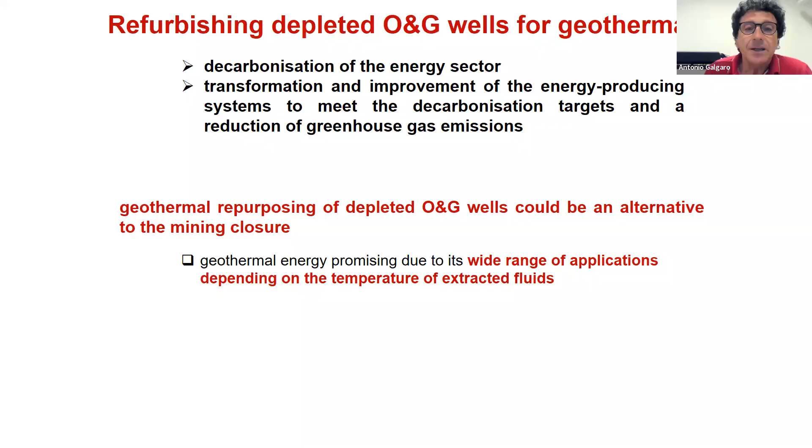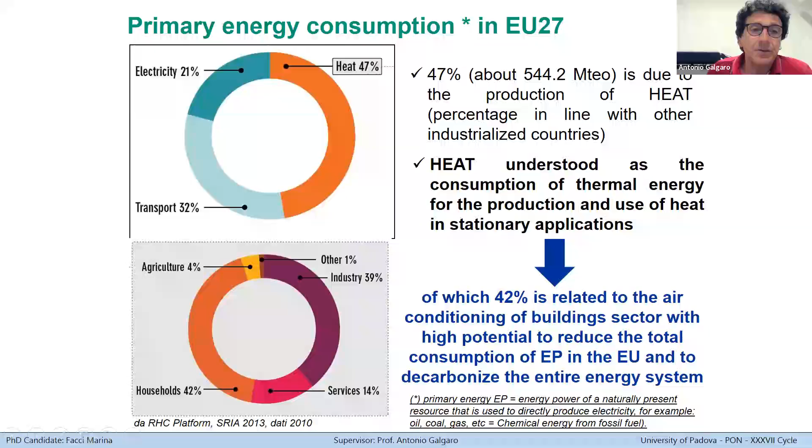We have evaluated in Europe, in the extended Europe of 27 countries, that one of the most important requirements in terms of energy is the heating of households, residential heating, and even electricity for residential and other types of users.

Oil and gas production is often linked with a large volume of waters, and in a lot of cases, due to the depth of these wells, the temperatures are higher than 100 degrees. The residual fluid after hydrocarbon use is water. So there is a sort of resource of heat and fluids that permits transferring heat from the depth, from the bottom of these wells, up to the surface.

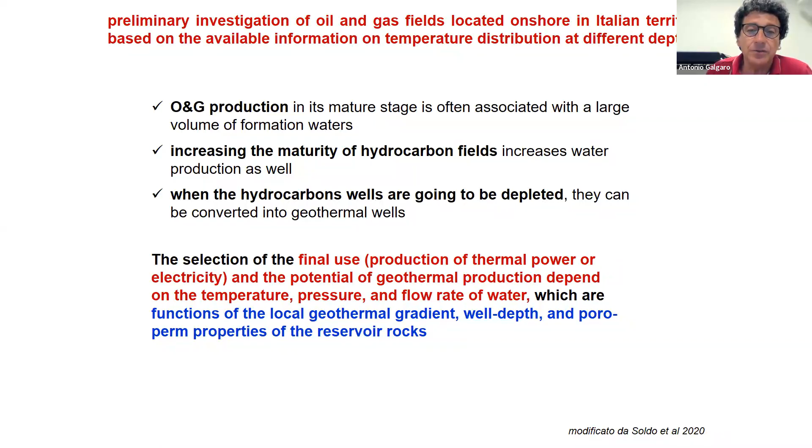In this case, there is no emission of CO2 if I reuse these wells with closed-loop solutions, which permit, thanks to the circulation of fluids into the wells, extracting heat from the ground and using it for all the needs of stakeholders, particularly electric power or direct use of heat.

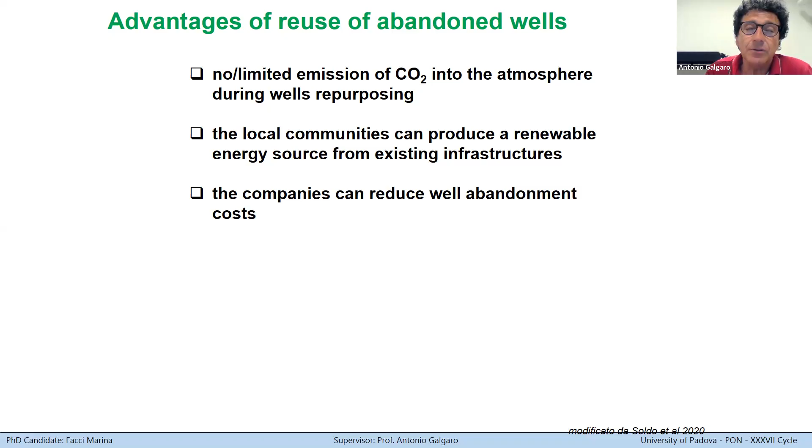Even industries can use this solution for heat needs in production processes, or for heating houses, or for instance in agriculture fields such as greenhouses or fish farms.

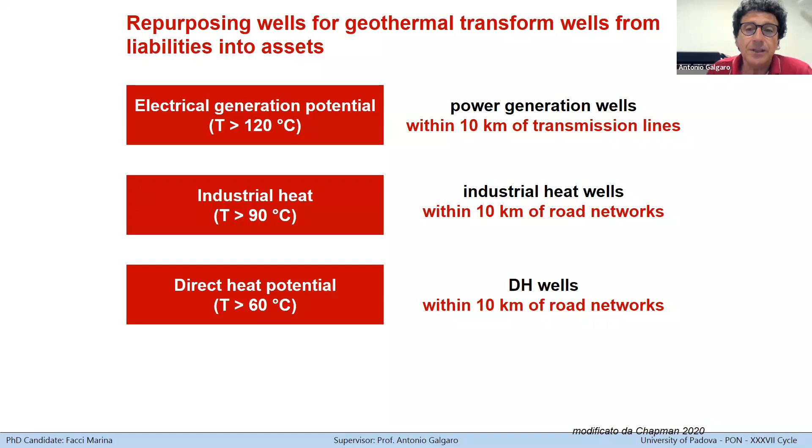Taking into account that the temperature of the wells changes the use, during our research we evaluated the higher temperature conditions. This information is available thanks to hydrocarbon drilling databases, and it's possible to adapt these wells in different ways to extract heat.

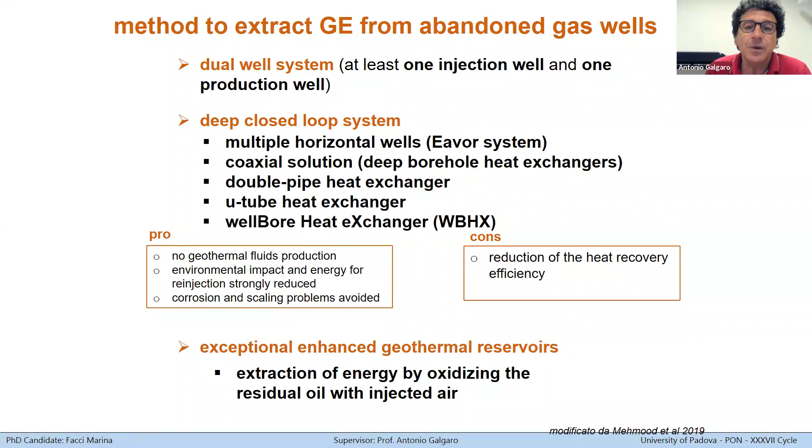In these slides you can see the different types of solutions. I'll show you the general aspect of the double pipe heat exchangers or U-tube, and the coaxial solution will be explained and shown by Dan Azimi, the PhD student in the last year of his scientific adventure, who will show you the results obtained from his studies, particularly in high temperature environments. I will show you only the middle of the three types of solutions.

Maybe I can use two wells close to one another, one for abstraction, one for reinjection - this is an open loop system. But closed loop systems are divided into two main families: the U-tubes, a couple of wells connected after refurbishing the two vertical parts horizontally to obtain higher efficiency in the heat exchanger process, or the coaxial systems that permit using only one borehole to extract heat.

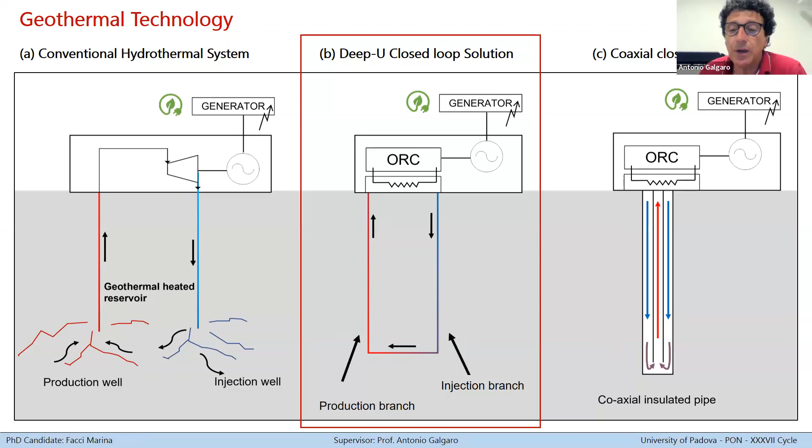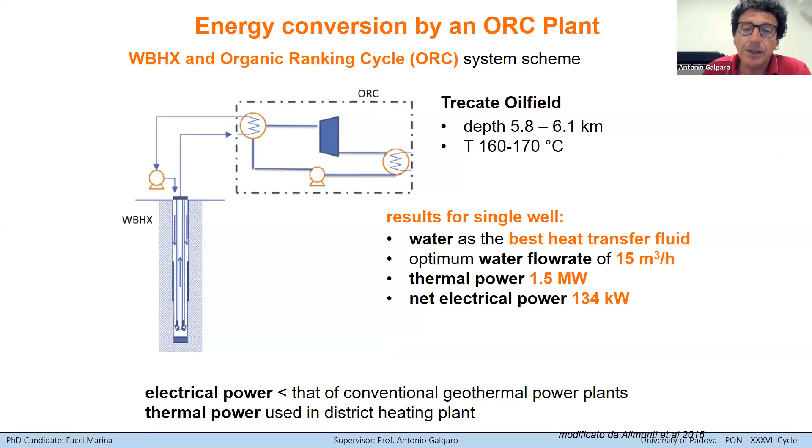To transform heat into electric power, we need as high as possible temperature of the fluids, and I can use a sort of binary cycle called ORC, organic Rankine cycle, that permits transforming heat into electric power. Dan will show you this type of solution.

There are different types of coupling of the two boreholes. I can use a simple tube to connect the two vertical boreholes, or create a sort of radiator. This technique is developed by a Canadian company, Eavor, that is applying one of the first examples in the world in Germany, and they are quite finishing the first phase of this radiator.

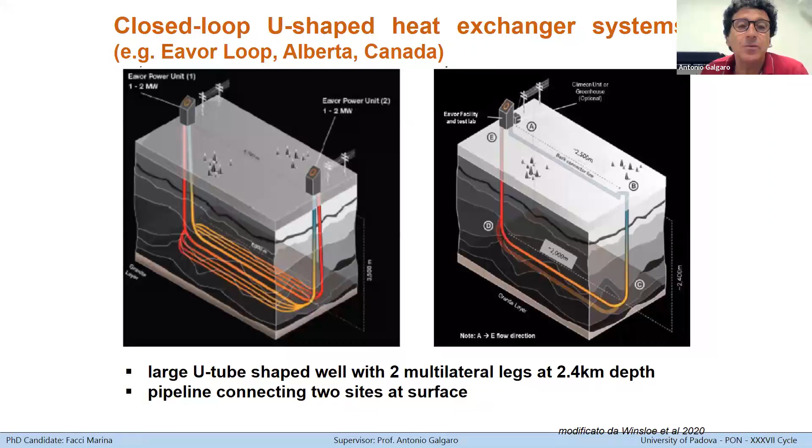The technique of directional boreholes is derived from oil and gas practice. So a lot of drilling techniques derived from oil and gas, hydrocarbon research, and wells techniques are adapted for geothermal uses.

In Italy, we have particular zones interested for hydrocarbon research, and you can see the lines in the middle of the plain in the northern part of Italy, and all the eastern part of our country. In this case, I have a lot of boreholes realized onshore and offshore, but the higher temperature zone is on the other side, in the western part, where I have Larderello, one of the most known geothermal areas in the world. The first electric power production from geothermal source was performed here in 1904. In the southern part I have the Vesuvian areas with volcanic zones, the Etna volcano, and the Aeolian Islands, and all the hot spots in Italy are in the western part.

So I have a difference between the hydrocarbon-prone areas in the eastern part and the hottest grounds in the western part. This happened because the higher temperature into the ground is not adapted to host hydrocarbons, since hydrocarbon molecules are destroyed by high temperature.

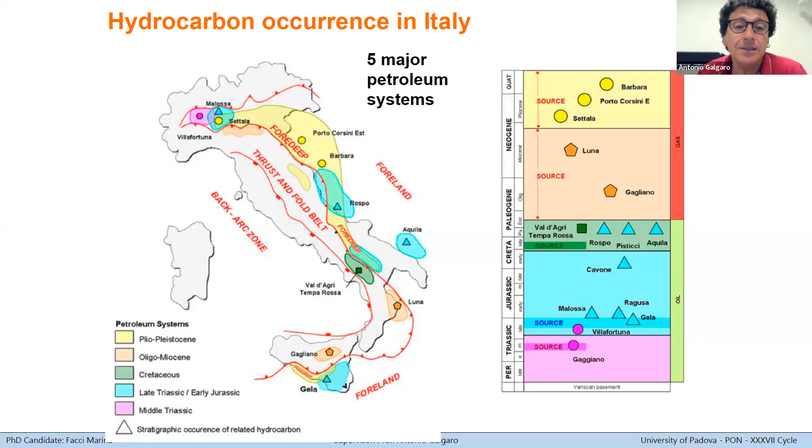But in any case, I have in a lot of cases temperatures more than 100 degrees that can be used for geothermal purposes. This is a summarized distribution of the 8,000 boreholes from 2,000 meters depth until 6,000 meters, realized over 70-80 years for hydrocarbon purposes. Most of them are abandoned due to sterility after drilling, or after depletion of the hydrocarbons.

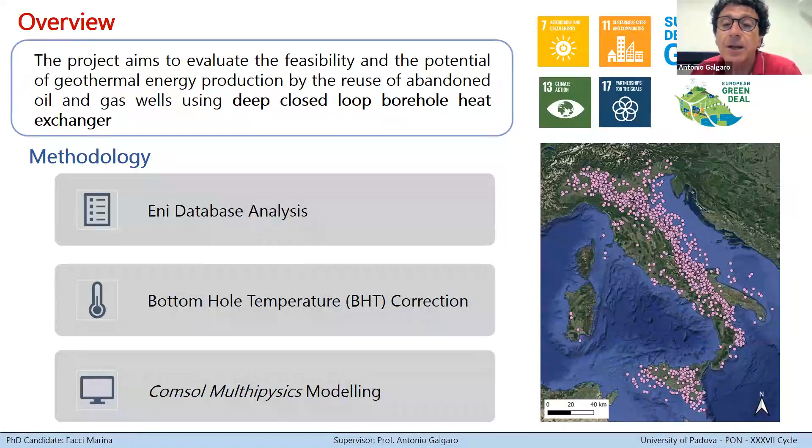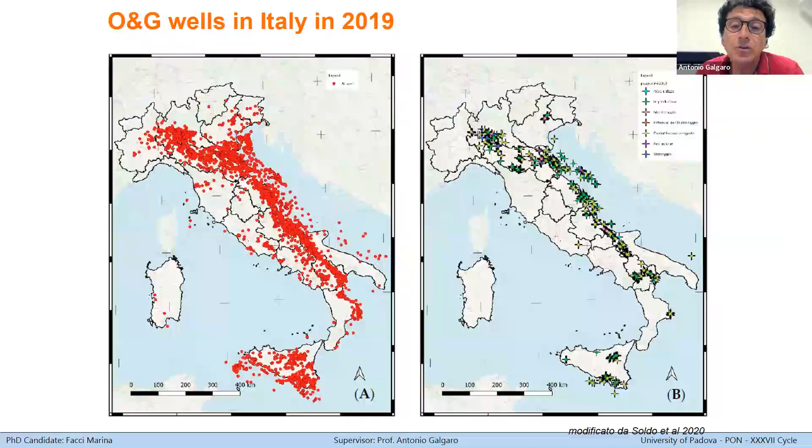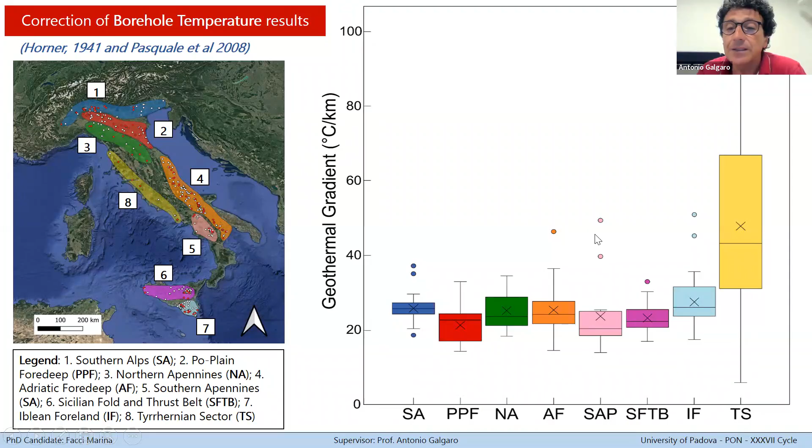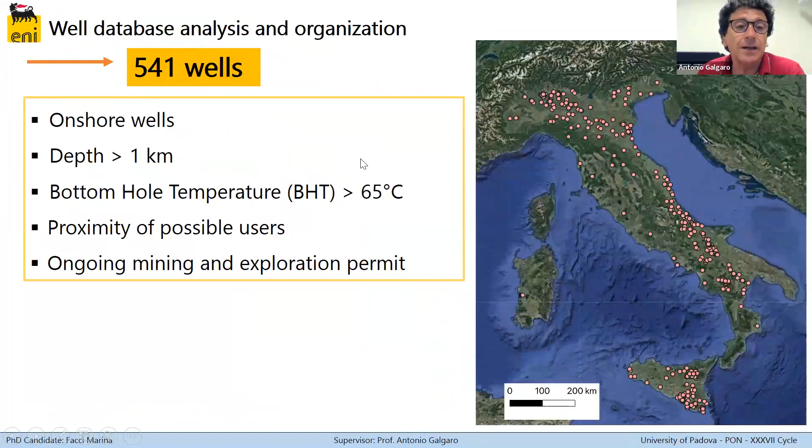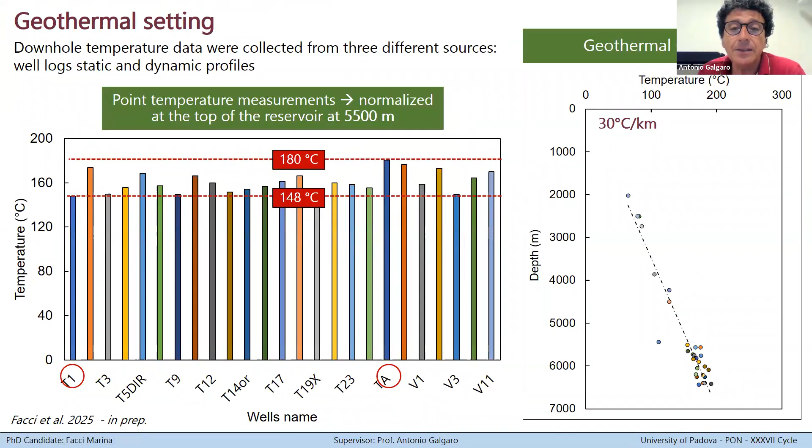But even in the Po Plain region, in the northern part of Italy, there are interesting cases close to Milan, where there are boreholes with very high temperature, more than 100 degrees. This is the distribution of borehole temperatures, and in Milan I have availability of temperatures from 150 to 180, that can be used for electric power production and heat distribution in the heating network.

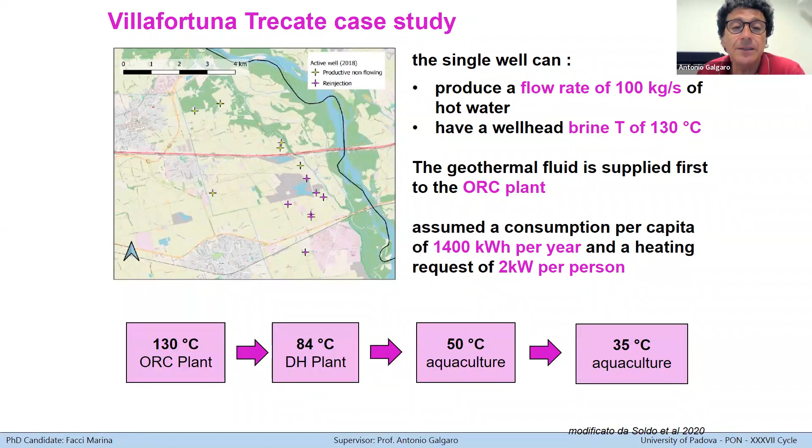One area is very interesting because it is not only close to district heating systems, but even closer to vast industrial heat sources, such as glass manufacturing, which permits a sort of recharge of temperature into the ground thanks to the presence of different boreholes, switching between them for storage during one season and production during others. This is the example of the Deep-U.

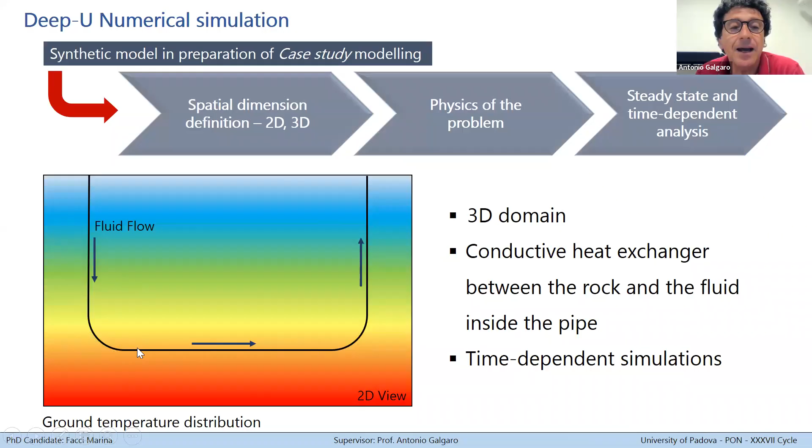The higher temperature level is crossed by the horizontal part of the trench connecting two just existing boreholes, and this permits a very reduced increase of cost along the path in the higher temperature zones, because the main process that permits heat transfer is conduction, and conduction has some problems due to the cooling effect surrounding the boreholes, which affects the outlet temperature over time.

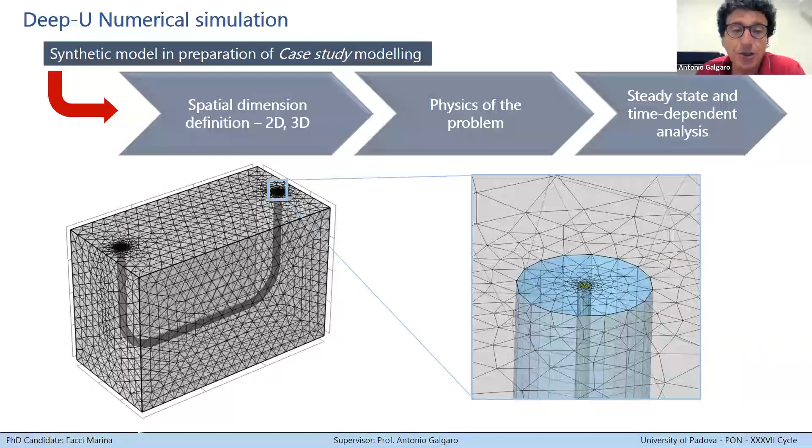Marina will explain this aspect better than me. This is one of the most important constraints of the closed loop solution.

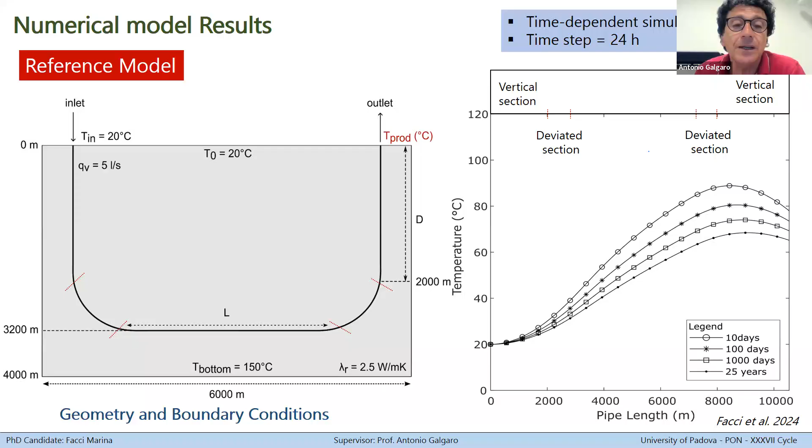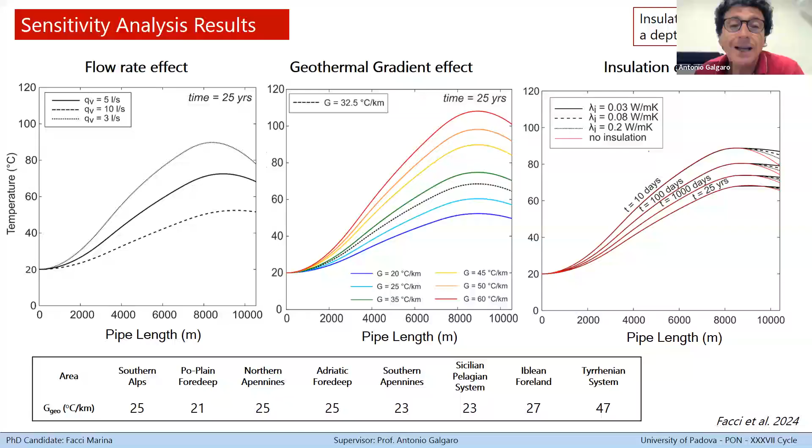So we try to detect how we can overcome this limit of conduction, and there are some options that permit adaptation of existing boreholes to increase system efficiency, maybe by insulating parts of the boreholes, such as the shallower part where I have the most heat losses, or prolong the existing borehole to intercept higher temperature at depth, or by changing the flow rate of the heat carrier fluid inside the boreholes, which permits balancing the cooling effect and energy abstraction.

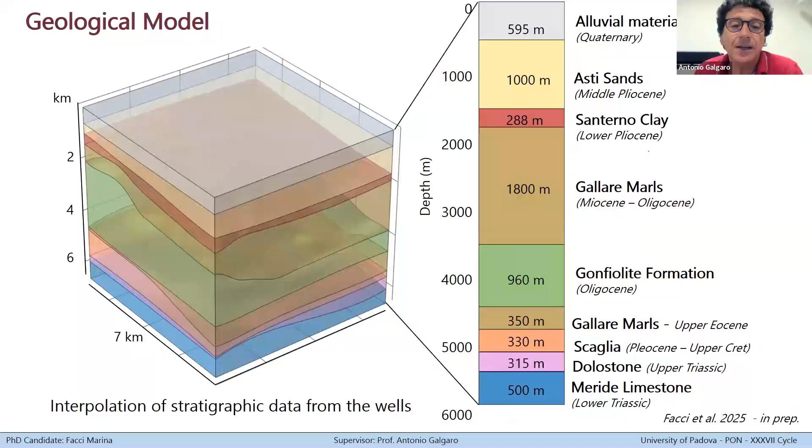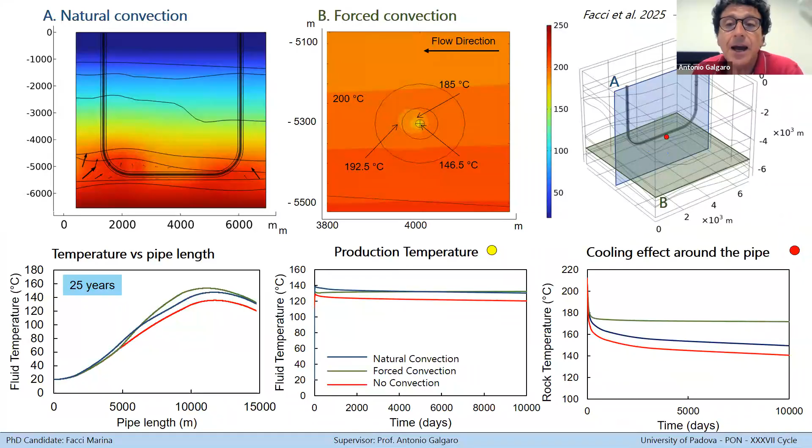These are a particular case in the northern part of Milan, with different types of sensitivity analysis changing different parameters to evaluate the best way to obtain maximum efficiency in terms of energy extraction and maximum temperature, because if I overcome 80-90 degrees, I'm able to produce electric power, not only distribute heat for direct uses.

Now I'll finish my part with a comparison of the cost of retrofitting an existing well versus drilling a new one. For an example of 2,000 meter depth boreholes, applying Monte Carlo simulation shows that the median cost of a well of 2,000 meter depth is around 8 million euros. You can convert that to your currency. If I choose retrofitting an existing well instead, the costs are less than half, around 4 million euros.

This permits us to evaluate the feasibility of reusing oil and gas wells in these particular conditions, because the cost of adaptation is quite half the cost of realizing new boreholes.

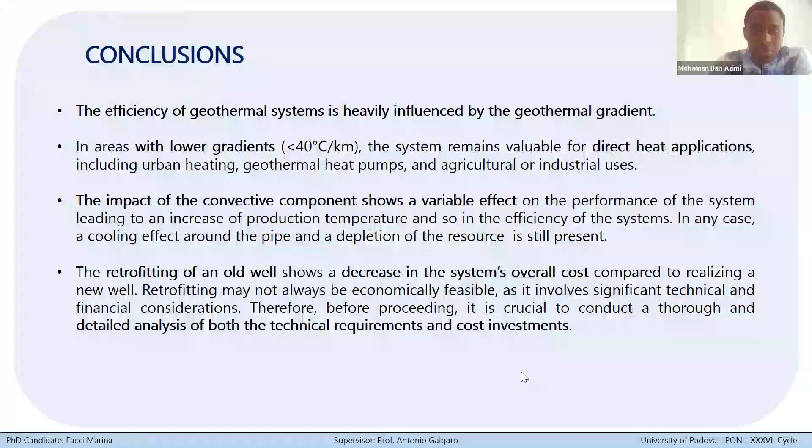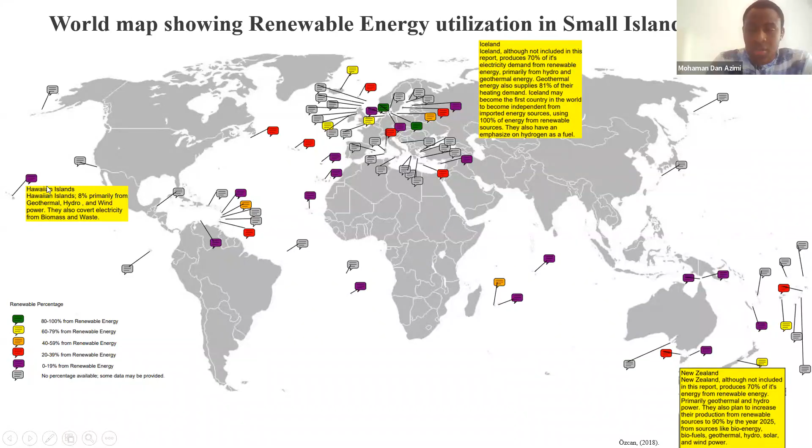As some examples, I try to point out areas or islands where they successfully implemented geothermal energy. One of the case studies is Iceland, and also Hawaii, and New Zealand.

A heat carrier fluid can be injected into the annulus space, and on its way down it exchanges heat mainly by conduction with the surrounding ground, then comes out through the center of the production pipe.

In the following slides, I will present some case studies I implemented and compare them with existing studies where they also conducted a similar numerical simulation of coaxial boreholes, but in those cases they limited themselves to just a constant temperature or constant thermophysical property of the heat carrier fluid.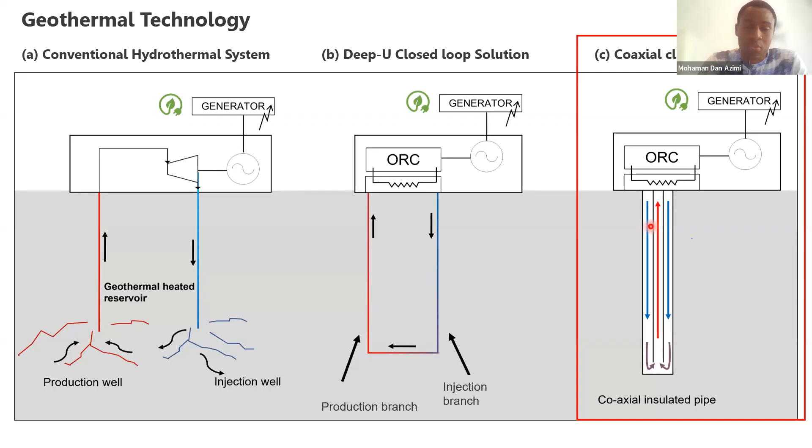Here are outlined the different case studies. One will be Krafla in Iceland, where we will see the effect of the thermophysical properties of the heat carrier fluid, in this case water. The second case study will be Ferrara, where I'll point out the effect of flow rate and insulation of the production pipe at the center. And finally, my own PhD case study.

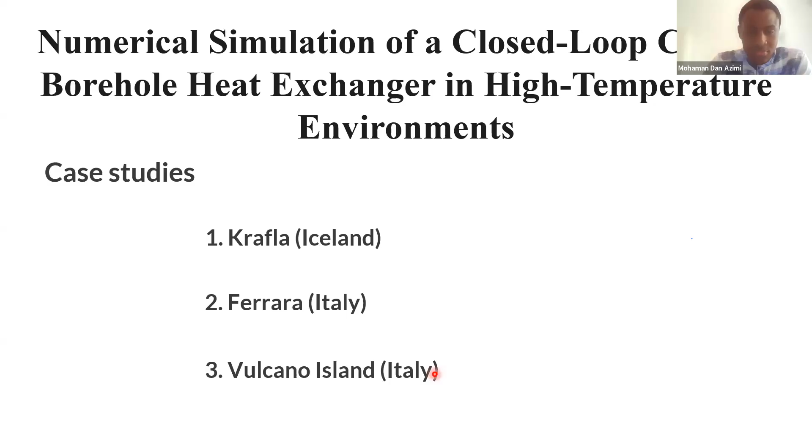Let's proceed. For the first case study in Iceland, as I observe in this figure, it's one of the more advanced regions in the implementation of geothermal energy. Here is a representation of the conventional usage of geothermal energy.

The geothermal fluid deep in the ground, close even to magma, is extracted directly into a turbine to produce electricity, and then it's injected back.

A few years ago they encountered a technical problem, and the geothermal plant in Krafla had a high pressure condition that blew out the casing of the well. Nowadays they are trying to investigate solutions to remedy this technical issue.

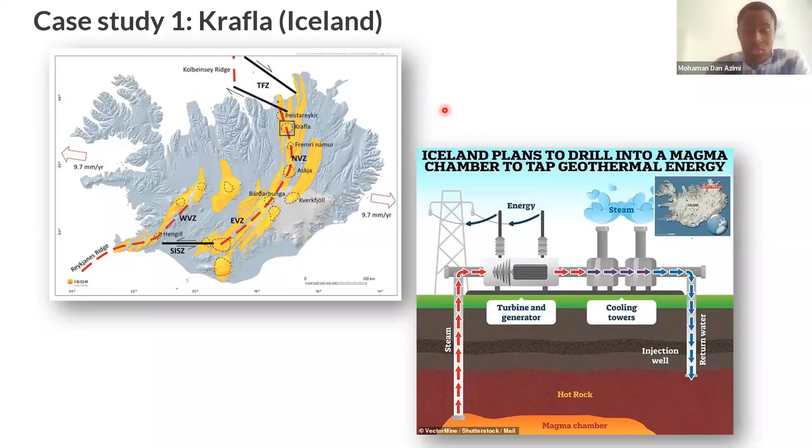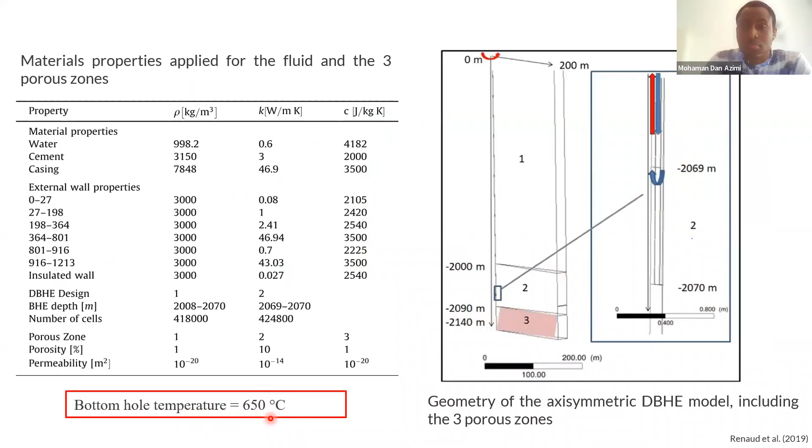One of the solutions, as I mentioned earlier, is the use of a coaxial closed loop borehole heat exchanger. From the work already done by Renaud et al., they implemented this solution, and the results were obtained using a numerical finite element code and software.

They observed that the solution can be implemented, but in this case they used constant water properties. So we tried to investigate the effect of these properties.

That is, the thermophysical properties of water. We implemented the same case in the finite element software COMSOL Multiphysics, in which we integrated the variation of the thermophysical properties of water with temperature and pressure, and we observed that the result is quite improved, compared to their own results.

So in this case, it will be important for the feasibility and cost-effective analysis to take into account this parameter, that is the thermophysical property variation of the heat carrier fluid with temperature.

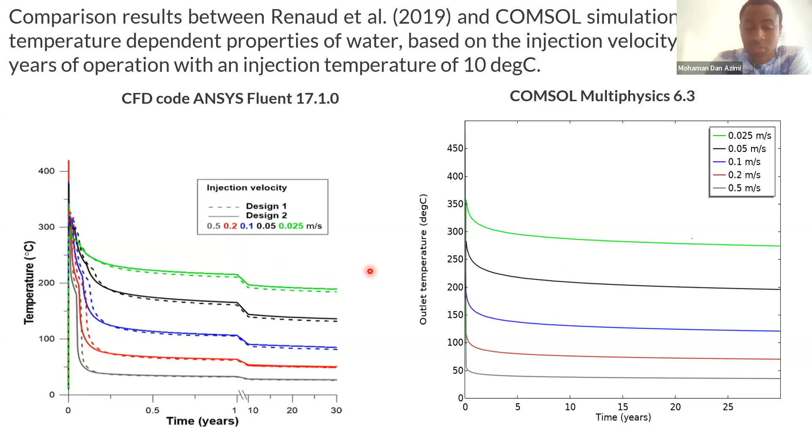In the second case, the case of Ferrara, for a little introduction, the Ferrara case, which is working nowadays, uses the conventional extraction and injection geothermal system, and they also implemented a sort of hybrid network in which, in addition to geothermal, they also use biogas.

And also solar panels to increase the efficiency, that is the provision of heating water to the city. In this case, they are now also trying to implement a coaxial solution.

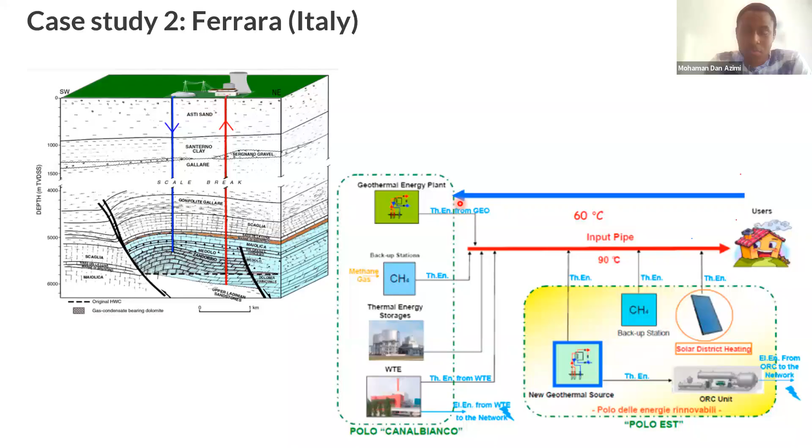Because due to the extraction and water injection, they observed that the reservoir is being depleted. So they are finding a solution in order to maintain a constant and long-term provision of geothermal energy to the system. In this case, we try to investigate the application of a coaxial closed-loop solution.

The bottom hole temperature is around 180 degrees Celsius. Here are the geometric parameters and operational parameters used in this. We try to simulate this solution in the case of Ferrara.

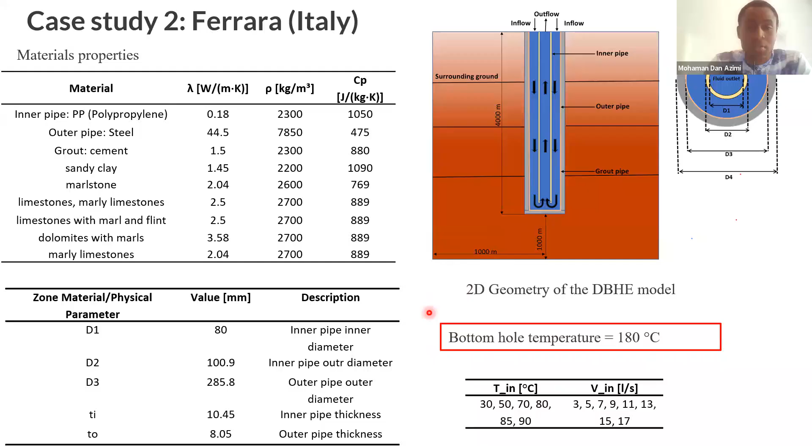Here is a representation of the evolution of the fluid temperature inside the heat carrier fluid, which is water inside the coaxial pipe, with respect to different injection flow rates. As we can observe, the injection temperature we implemented is 90 degrees.

Since the injection temperature is higher compared to the surrounding at shallower depth, it loses heat to the surrounding until a depth at which there is equilibrium of temperature between the surrounding soil and the fluid inside the pipe. It is then heated up and comes out through the central pipe.

We can also observe heat loss between the fluid inside the central pipe, because it is hotter compared to the fluid at the annular space. Now we try to investigate the effect of insulating the central pipe by applying VIT, that is vacuum insulated tubing solution.

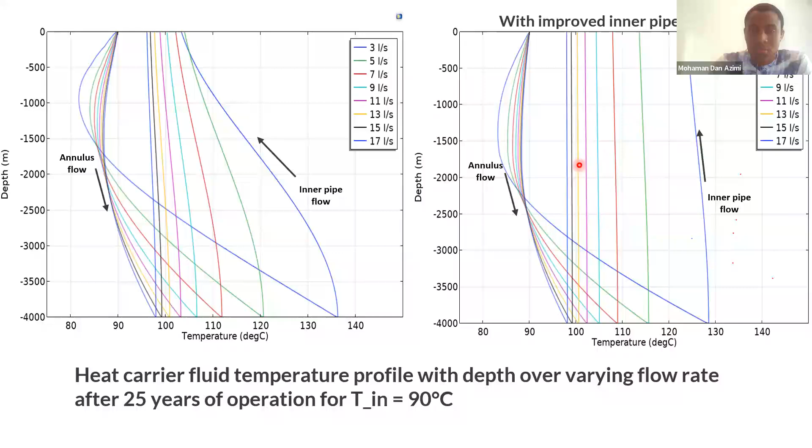And we observe that the outlet temperature is highly improved, that is the heat loss is reduced. In the next slide is the representation of the evolution of outlet temperature with respect to time for different injection temperatures.

We observe that if we want a high temperature at the outlet, we need to inject also a high injection temperature. But this needs a sort of cost-effective analysis in order to determine the optimal injection temperature and flow rate for the efficiency of the system.

Similar result: we can observe that when there is no improved inner pipe insulation, the temperature at the outlet is quite less compared to when there is perfect insulation of the inner pipe, due to the reduction of heat losses between the fluid inside the tubing and that of the annulus.

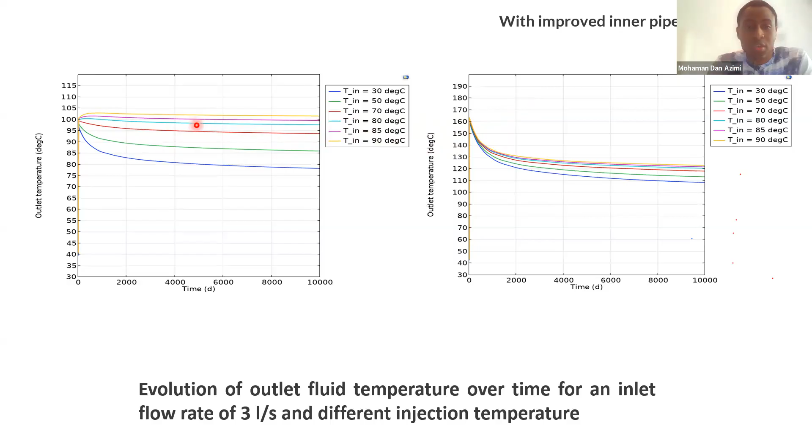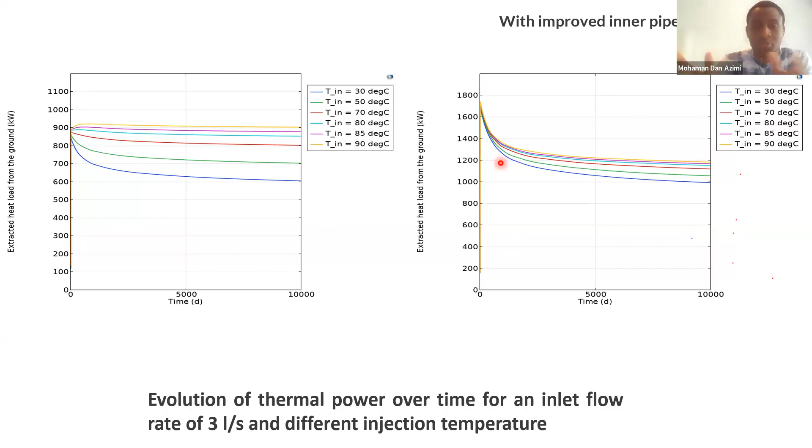A similar result is obtained with the extracted thermal power, a similar trend, because the extracted power is a product of the flow rate, the heat capacity, and the difference between the inlet and outlet temperature.

Now, getting into my case study for my PhD course, I am implementing this coaxial solution in Vulcano Island. As we can observe, most of the islands worldwide are isolated from mainland, and these areas are highly dependent on mainland for their energy needs and also potable water needs.

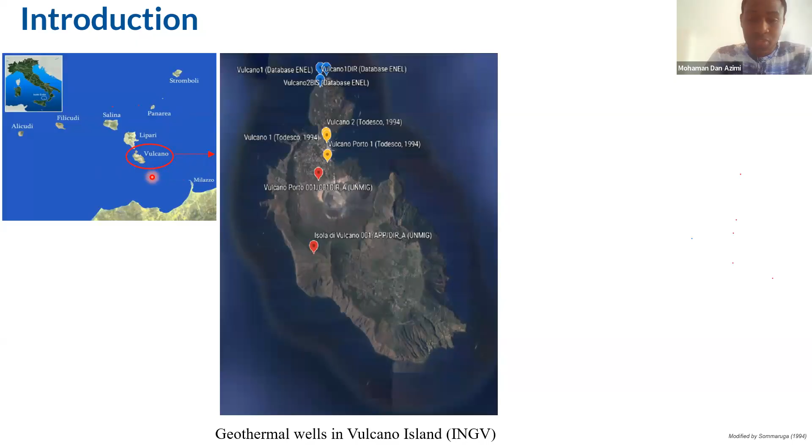So investigation by the National Institute of Geophysics and Volcanology shows that from one of these wells, we can have high temperature at just shallow depth. So this is quite a high enthalpy anomaly, and it is highly favorable for geothermal implementation.

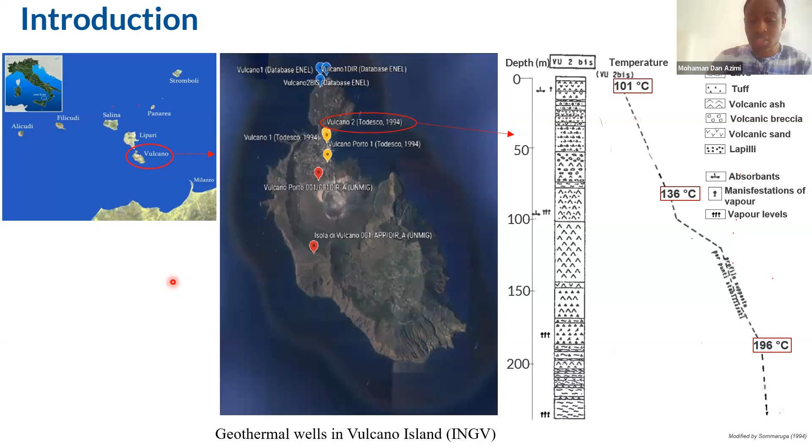In this regard, we are proposing this solution in order to make the island independent from electricity and potable water needs.

So we will implement the coaxial solution where the heat extracted, if high enough, that is, the outlet temperature is greater than 100 degrees, can be directly expanded into a turbine.

We can use a secondary heat exchanger system and ORC plant, where there's a secondary fluid that can evaporate at lower temperature, and this secondary fluid can be expanded inside a turbine to generate electricity. And now the residual temperature fluid can be directed to a desalination plant to desalinate water from the sea and produce potable water for the island.

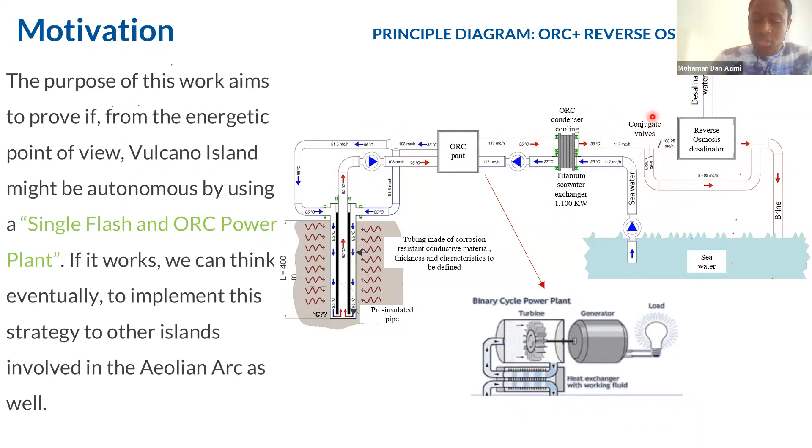So here are the parameters we set and introduced inside our finite element model software. The operational parameters for this presentation include an inlet temperature of 90 degrees, because the aim is to produce electricity. So we try to impose a high injection temperature and observe what will be the resulting outlet temperature, and lower flow rate also.

And the simulation was done for 25 years, approximately 10,000 days. The bottom hole temperature, because from the previous graph I showed, we have a lower temperature at about 200 meter depth, due to the fact that new site characterization are going on.

So we don't have the extension of this temperature profile at deeper depth. So we try to implement a sort of constant geothermal gradient for a 400 meter depth borehole heat exchanger. 400, why? Because from the regulation, and also due to the fact that Vulcano Island, and also all islands worldwide I guess, is UNESCO protected. So the minimum borehole depth.

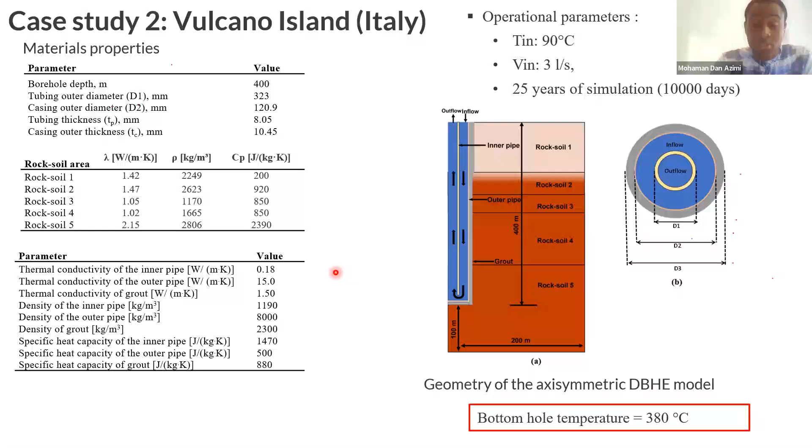Getting deeper, for sure, we encounter higher temperature, and also the volume of fluid that is in contact with the surrounding is also increased. That is, the residence time of the fluid inside the ground is also increased, so it had more time to extract heat from the surrounding. So this is the effect of the borehole depth.

Coupling this with the fact that in the previous case studies I showed the effect of flow rate and injection temperature, having this enables us to do a sort of sensitivity analysis to understand which combination of all these parameters enables us to obtain the best and most cost-effective energy solution for the island.

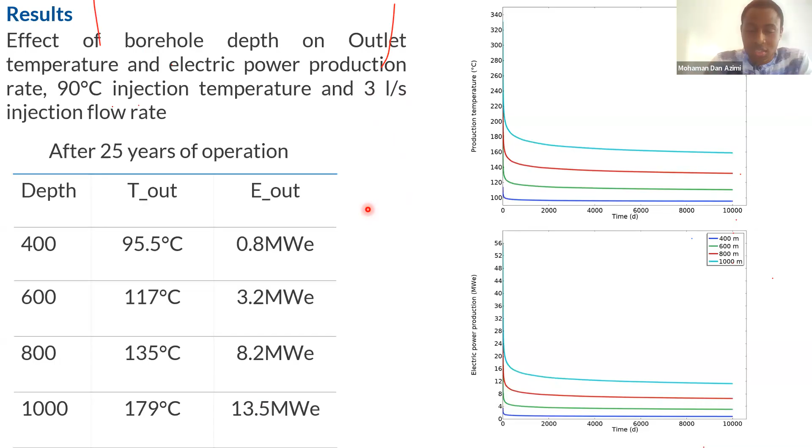Maybe I have been fast, and more development can be done in the question and answer section. Here is the Geothermal Research Group of the University of Padua, and here is the end of the presentation. Please feel free to ask any question. It will be a pleasure for me and also the Professor to try to answer it. Thank you for your attention.

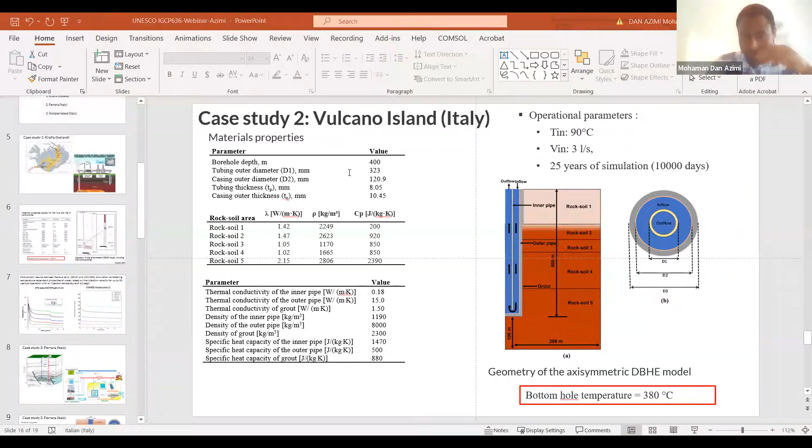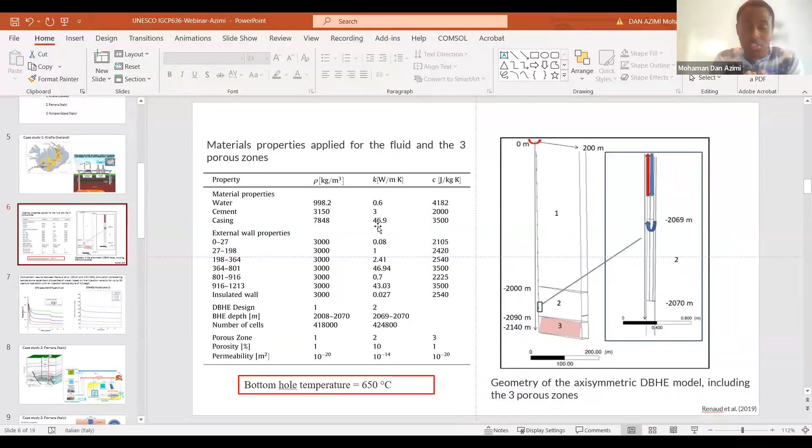In our case, we implemented a temperature-dependent property of the water inside. Yes, as you can see here, the scaling they use just compresses the horizontal scale, but it's the same. We implemented the same boundary conditions, just the physical property of water dependent on temperature that we implemented, and we simulated and observed that the outlet temperature is quite improved because as temperature changes, density of water changes with temperature, even the heat capacity changes with temperature, and thermal conductivity also changes with temperature. These properties are already existing as inbuilt material properties in COMSOL.

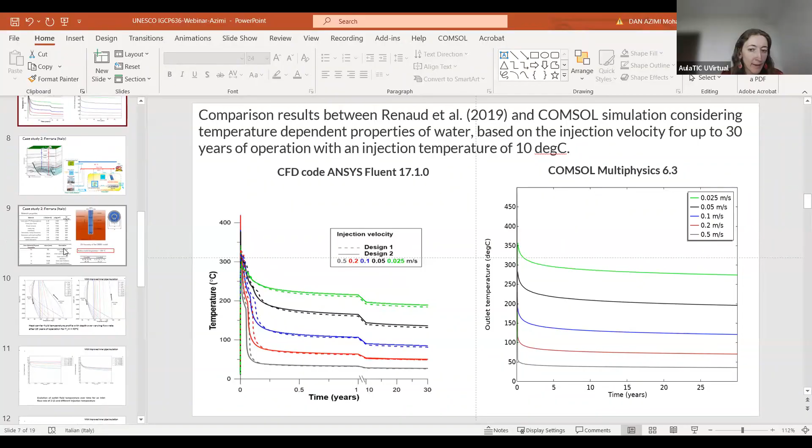So we just implemented it and observed that the result is quite improved. Okay, and what about the insulation material that you use in COMSOL? What kind of material and thickness do you use for the insulation, to compare the well alone versus with insulation, I think in the next slides. This one? Yeah, the insulation material we use in the first result is this one, used with this initial material property.

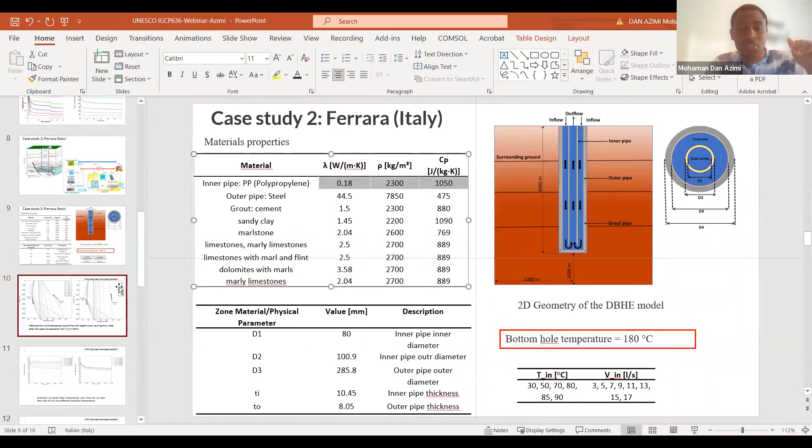And now improved insulation is used with VIT, vacuum insulating tube, that is made of 2 sheets of steel, and in between these sheets is air, because air is a poor conducting material. So it's just air that exists between the two sheets. We observed that this insulation quite improves the outlet temperature, because it reduces the thermal short circuiting between the downward and upward flow.

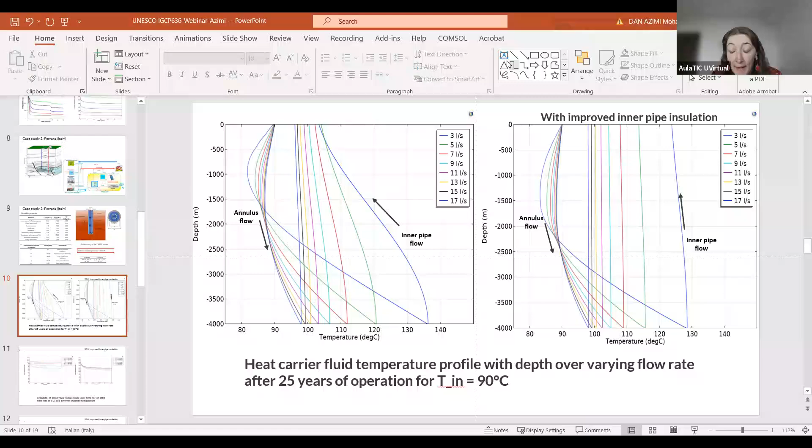Okay, so we have some questions in the chat. Maybe you can also read them. The first one is from Jasmine about the feasibility of electricity production using deep closed loops: the heat exchanger looks okay, but economics is more questionable. These systems are very expensive and power production may not be economically viable. Do you have results to share on the economics of those systems? Maybe both of you can answer or give your opinion.

If I can start the answer, we provide a sort of first raw evaluation because there are very few examples, quite nothing. But there are other aspects to take into account, not only the practical cost, but the reduction of mining risk, due to the fact that I know the geological situation thanks to the data obtained from existing wells. This permits facilitating the financial aspects, because if I reduce the mining risk, I'm more prone to financial covering, since the risk is lower than in a situation where I drill without having direct information on the site.